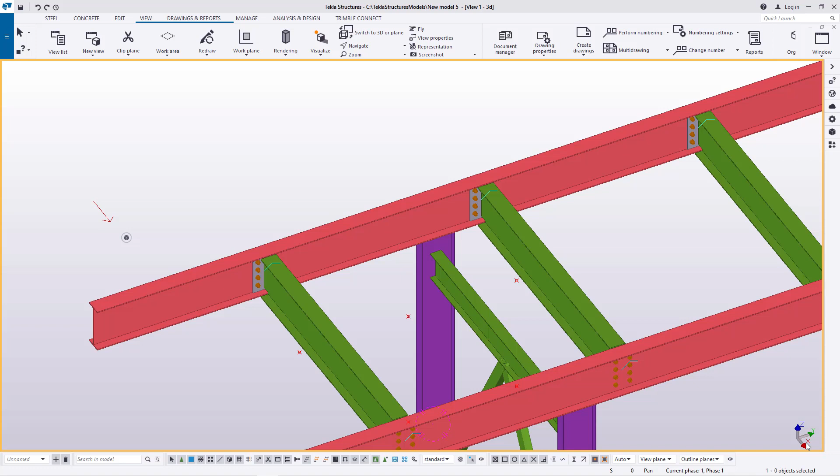Today we are going straight, and we'll be working only on the pedestrians walkway today. Let me just bring it close so that we see actually what we are doing clearly.

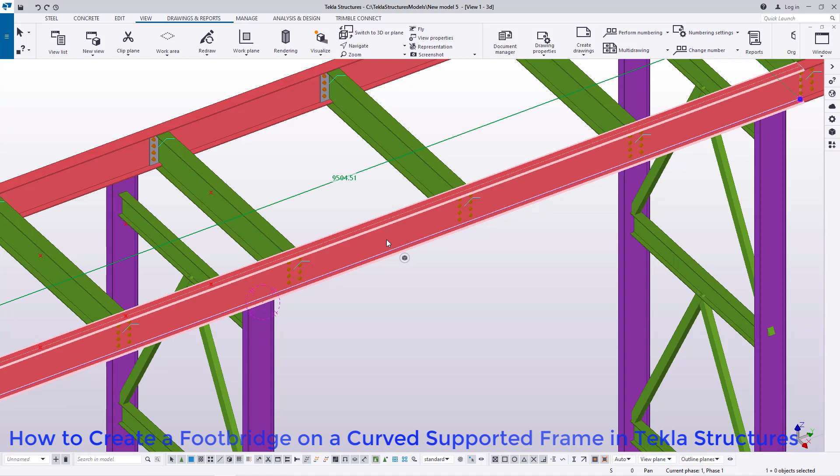Now I'll pick these beams. Let me just arrange myself here and select all those beams. Press Ctrl and select all these. I'll select all these individually because I want to copy them up at a distance of 1.5. Let me just select this.

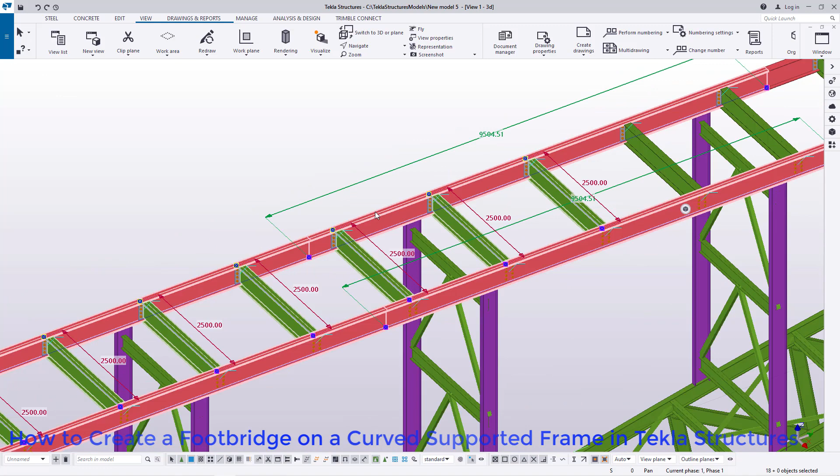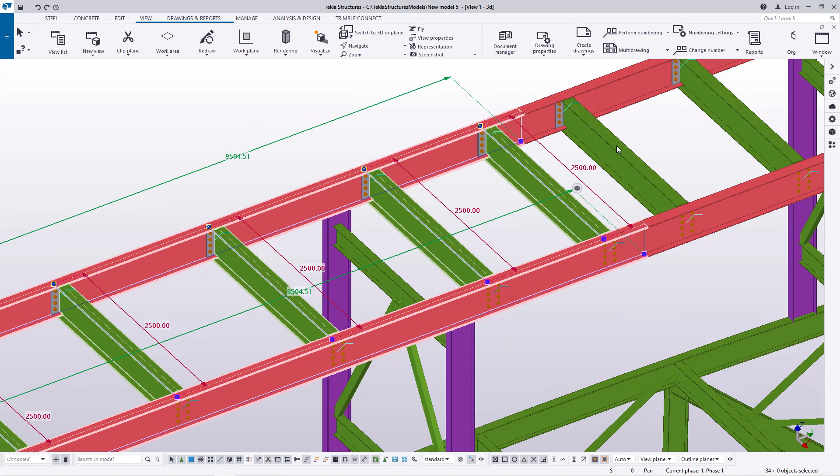Let me select everything here. Select this. You just need to be keen in picking whatever you want to copy to a different location, so that you don't pick any unwanted steel member. Just continue picking these steel members. Select that and select on that and select that.

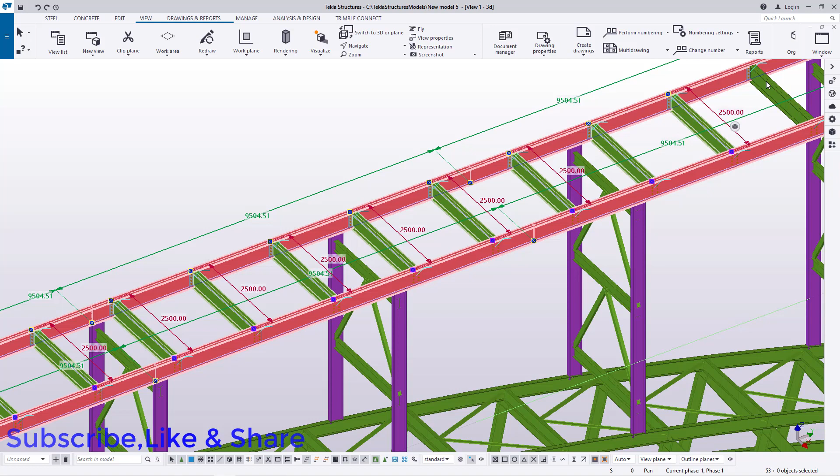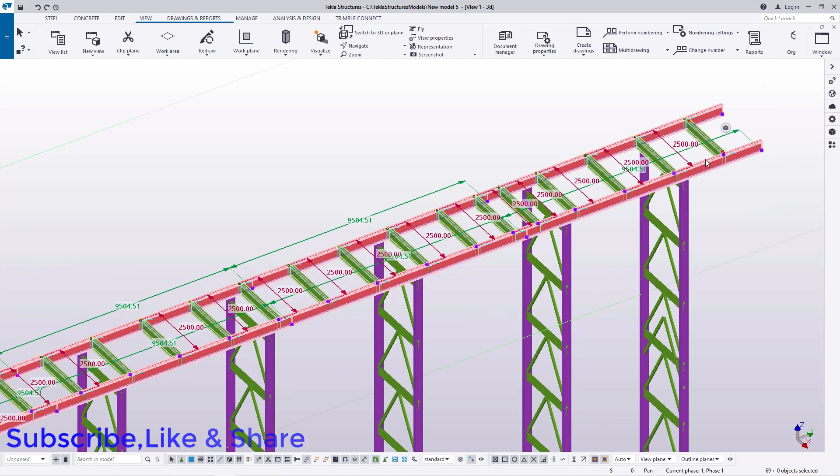I'll select that one. Let me select all these prior to taking them up at a distance of 1.5. Just select all this. It might take a little bit of time, but you'll be happy with what you'll see us doing. Let me just bring it close, press Ctrl, select on that. Now I'll zoom out because I've selected everything.

What I'm going to do now, I want to offset it up, or copy this up by 1.5. I'll right click and come to special copy here and pick linear, and I want to take it up along the Z axis here by 1.5. I'll change this to 0.

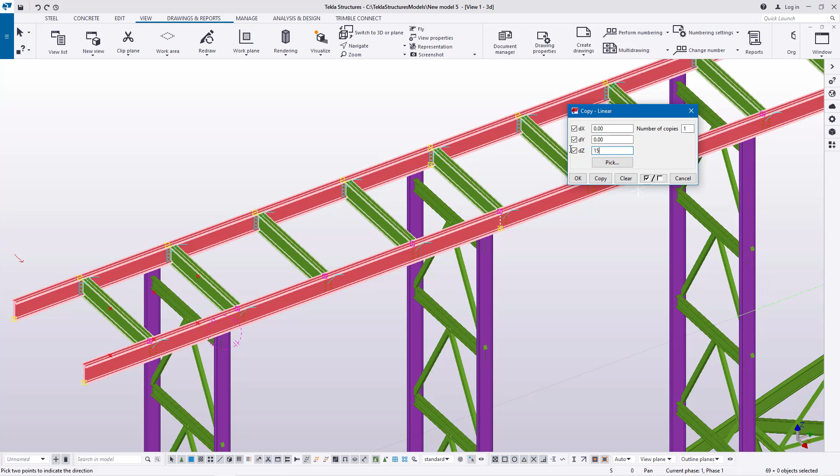I'll change this to 1. I'll change this to 1.5, and I'll click OK. We've copied this up here, and this is how it looks.

You can see that we need a copy or a similar frame on top of this. So what we're going to do, it's simple.

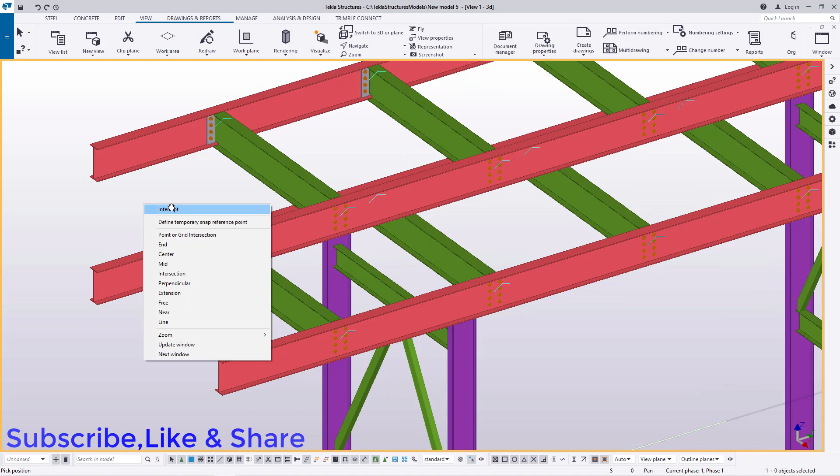I'm going to mark a point along these beams. I'll click any point and pick at any location, and I'll snap right here. I'll snap right there, and snap right here, snap right there. I'll select these points and select that point, right click and come to special copy.

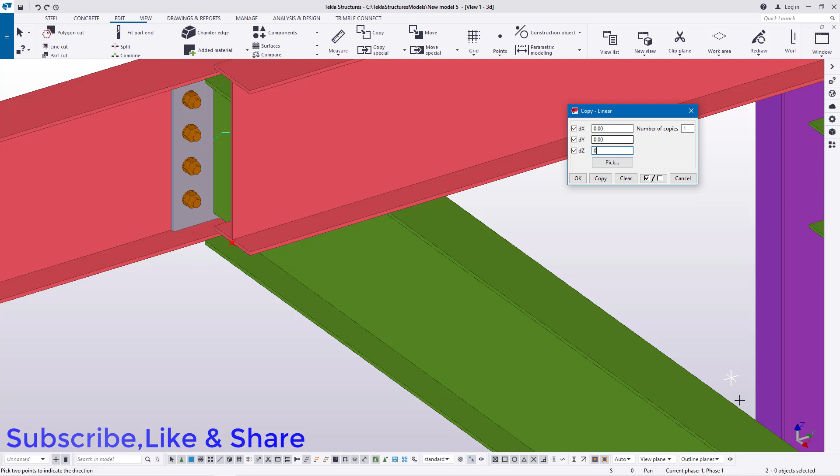I'll copy at a distance of 600 along the y-axis. I'll type 600 and click OK right there.

So I'll select on these points, press Ctrl and select on that point, and I want to copy it from this point away from this point at a distance of 2 meters. I'll right click and come to y-axis here and just feed 2 meters and click OK.

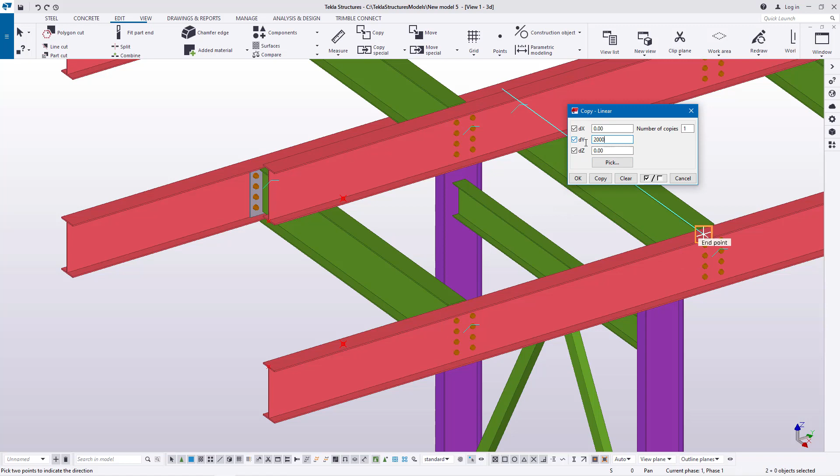That's okay. Now I want to get the midpoint of these 2 points because I want to brace. We are looking for support for this top frame that will be holding a slight thickness of concrete that will be laid on top of this frame.

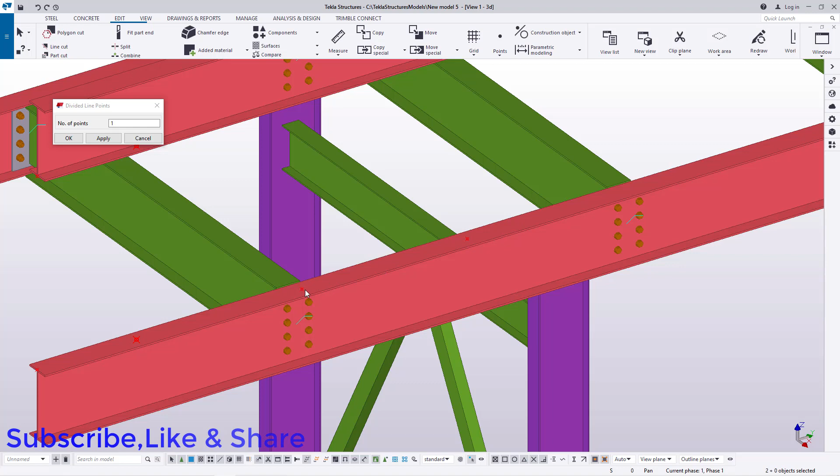Now I'll come to points here, edit and come to points. Then I want to locate a midpoint between these 2 points, and I'll transfer this midpoint upward by selecting on it and copy it right on that spot.

Right click and interrupt and terminate that command. Now I'll come to steel here, right here, and select on that. I'll snap on that spot and snap on that spot, and I want to bring it close so that I see exactly what I'm doing.

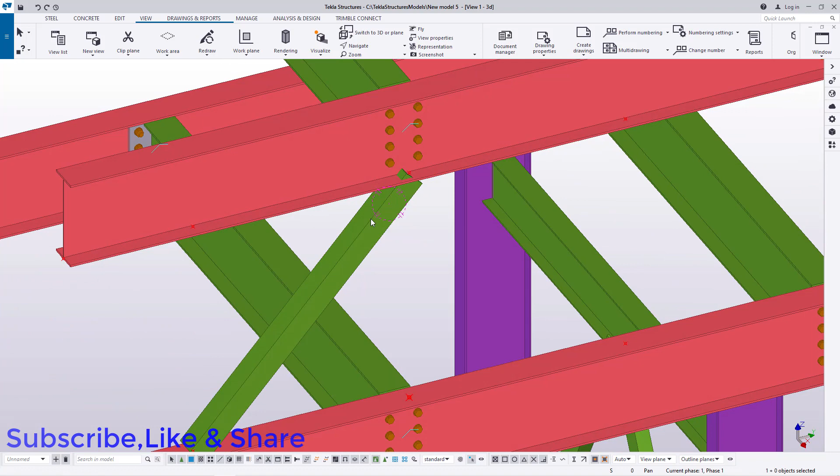Is it correct? This is correct. Let me check this steel member. This steel member is 100 by 100 by 8 millimeter thick. That's okay. And then I'll check the position of this member.

It's positioned in the middle. It's running right at the center of this member. So that's how I want it to be arranged.

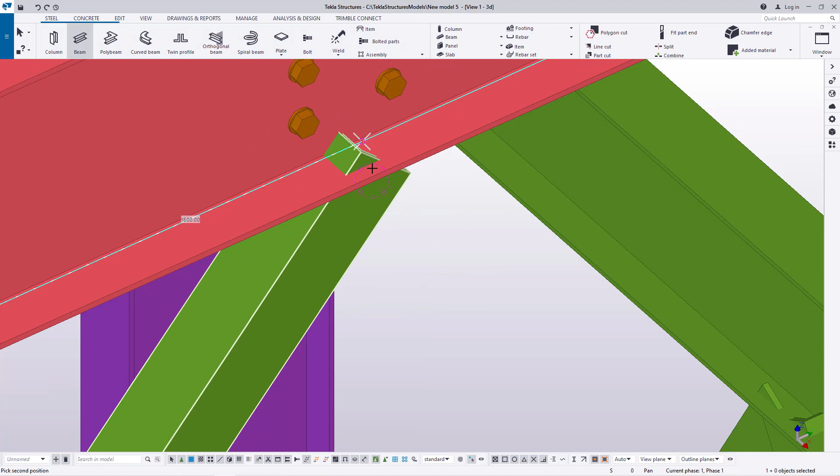I'll come to steel here, pick on the beam and snap on that spot and zoom out and target a point where we located right there at a distance of 2 meters. Now I'll come to new and try to check whether this is correct.

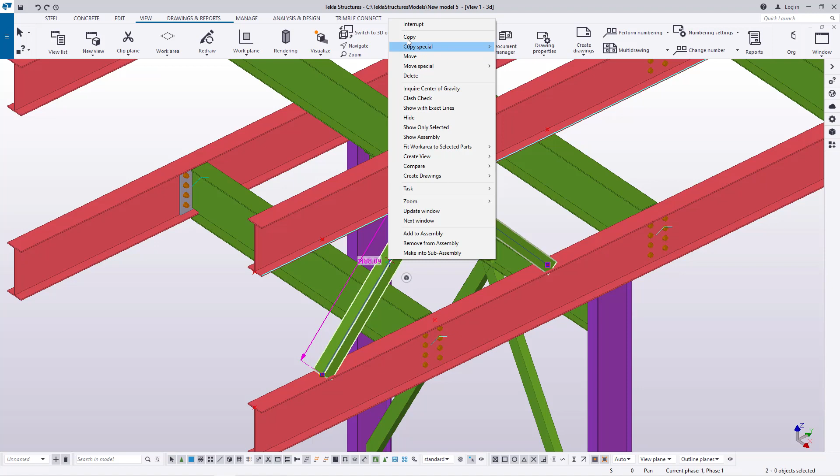This is correct, and what I'm going to do once again, I want to just copy this, select on this and press Control, select on that and come to copy, and I want to copy the same thing at the end prior to invoking a copy command that will populate it along the full length of this bridge.

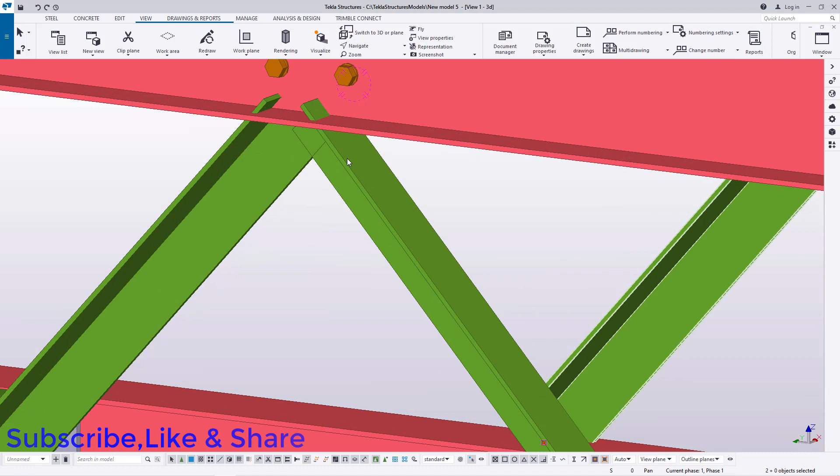So we have another one there, we have another one here. So at this end, what I'm going to do, I want to just turn the back of these members. I'll come to rotation here and I'll pick below. I'll use back and turn that round. I'll pick that also and pick the back end. So that's okay.

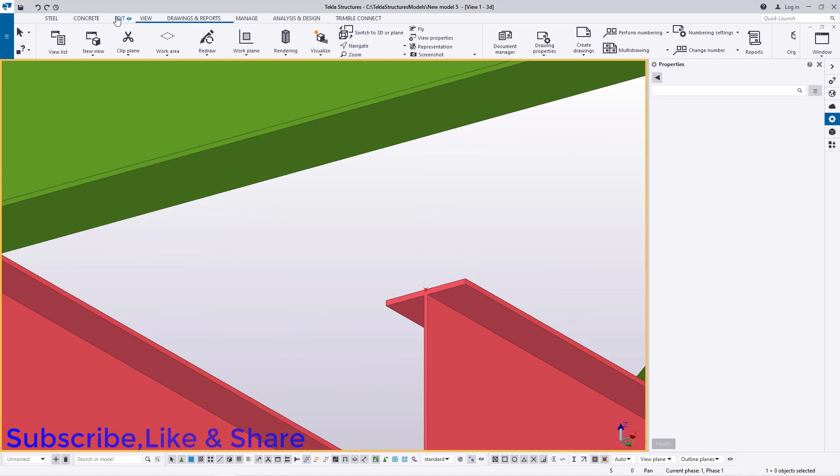Now I'll come to the bottom end of this beam. I want to mark a point because we want to place a brace on the bottom end here. So we must mark the points we intend to start placing our bracings. A point has been placed on top, at the bottom end of that member. Now I want to mark another point here.

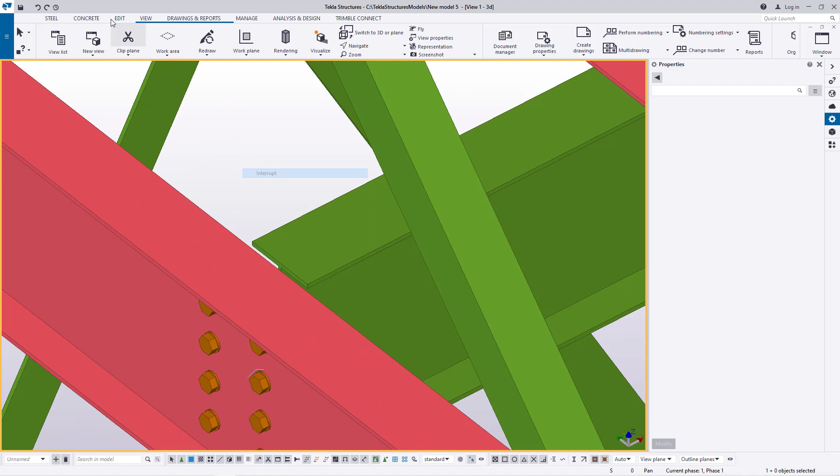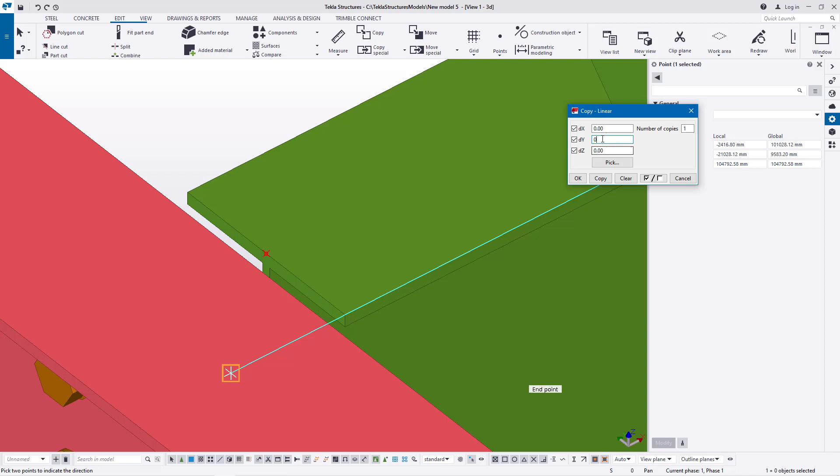Right click and come to point, pick on line points. I'll pick at any point and snap on that spot and select on that point. Right click and come to special copy, pick linear, then check the axis in which I intend to copy this point. I want to give it an offset of 200 along the y-axis, so I'll fit 200 here and click OK.

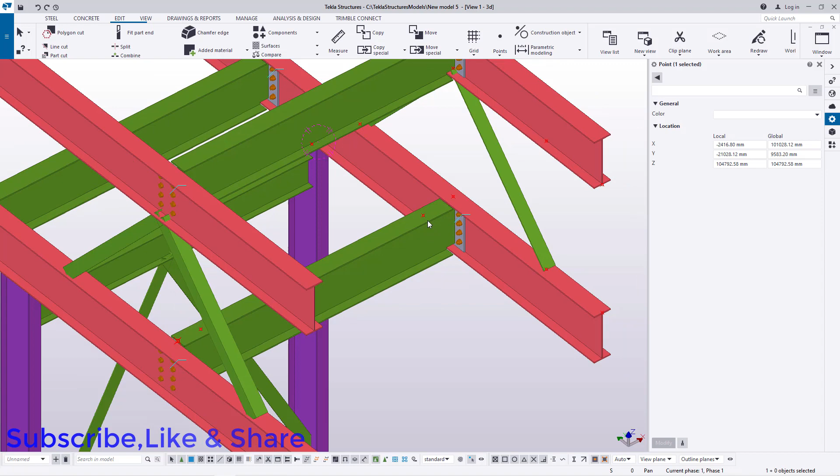I want to copy the same at the end. So I select this point, right click and come to copy, hold it from this spot and copy it at this spot. So we have these points at those locations, this one and this one.

I'll come to steel here and pick a point. I'll pick a point at the bottom end here and place a member right there, and place a member right here. So we've picked a wrong member, we've picked a wrong position.

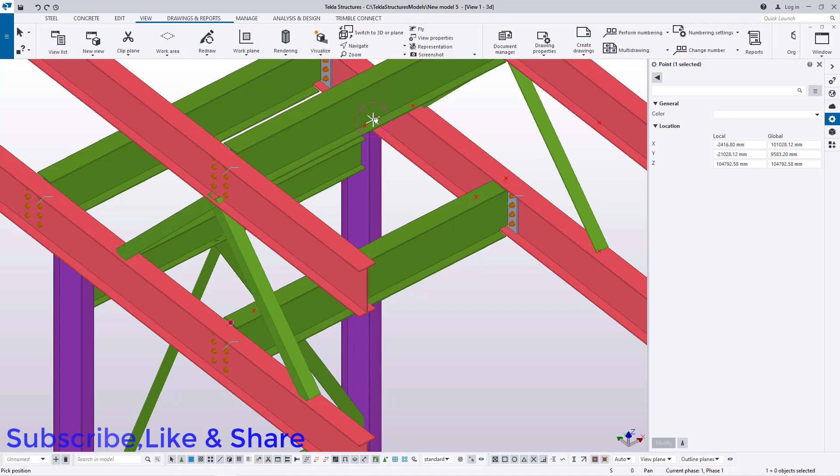So we'll come to navigate. That's why it's key to make sure, prior to placing members, you must be really keen on where to start placement of these steel members.

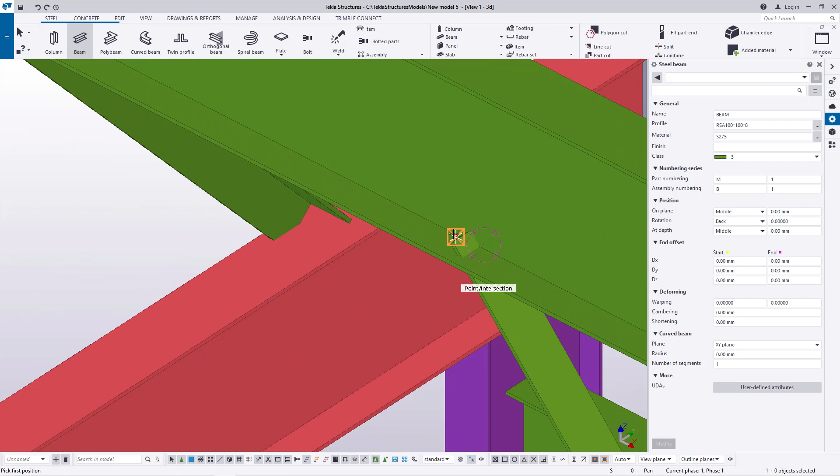I'll come to steel once again, I'll pick beam, snap on that spot and snap right here. And I'll go on that midpoint once again and snap right there. What I'm going to do is rearrange these members to position themselves appropriately.

So what I'm going to do, just double click on this, then pick below and change that so it should be back to back, like you can see.

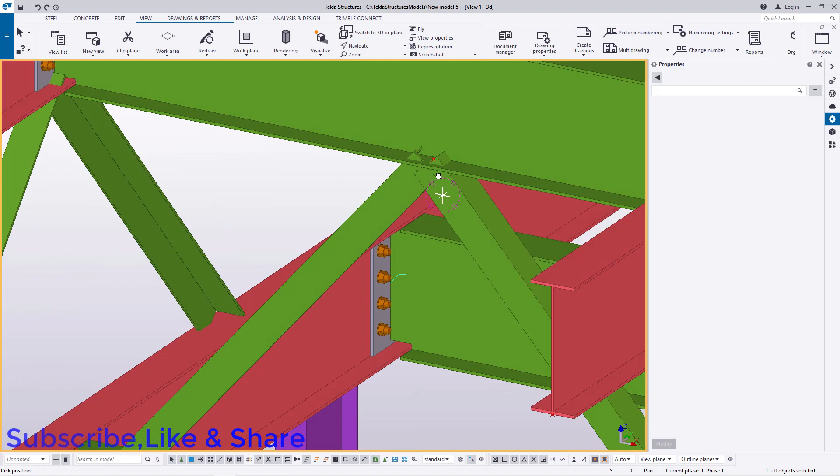So what I'm going to do here, it's simple. I'll select all this, press Control and select on that, right click and come to navigate. I'll turn that round and press Control and select on that. I'll right click and come to special copy here and click copy. So which axis do we intend to populate this along? We'll copy this along the x-axis, along the y-axis here.

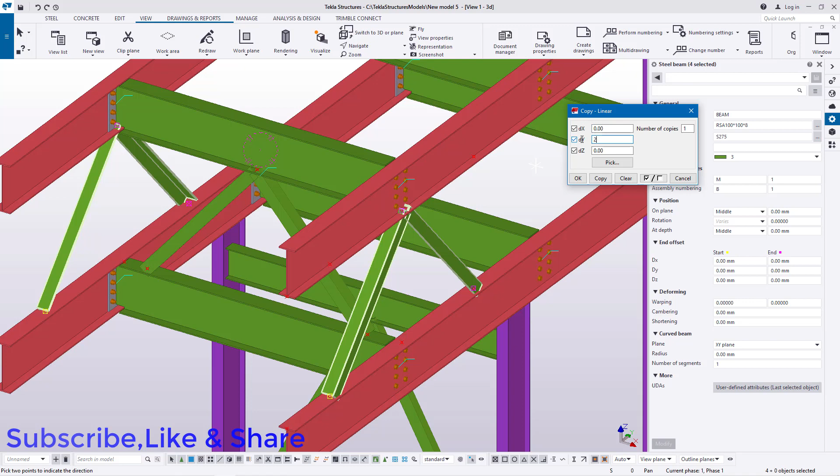This will be copied at a distance of 2 meters, so we need 104 of this. I'll zoom out and invoke the copy command here. We'll go ahead and click copy, and there is a request to expand the view. We'll just ignore that.

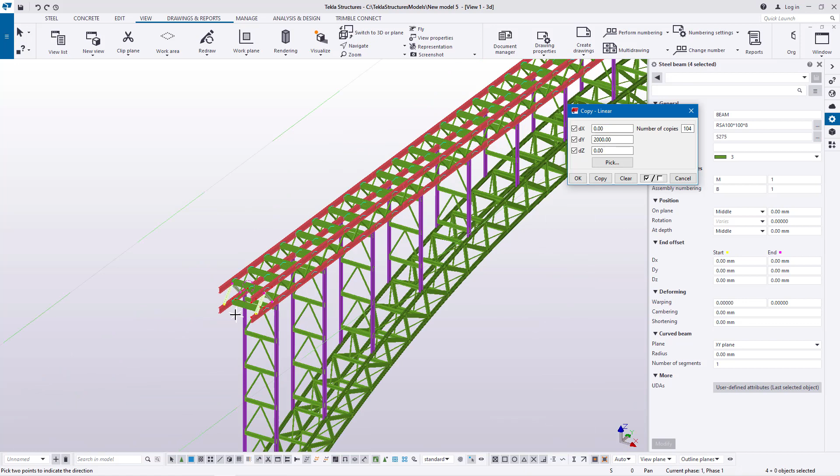It's way out of our reach. So what we are going to do is undo that and change this to 46 and click OK, so exactly it will end right there.

I'll come to that and you can see the braces are exactly in the best position where we intend them to be. Now I'll come to navigate.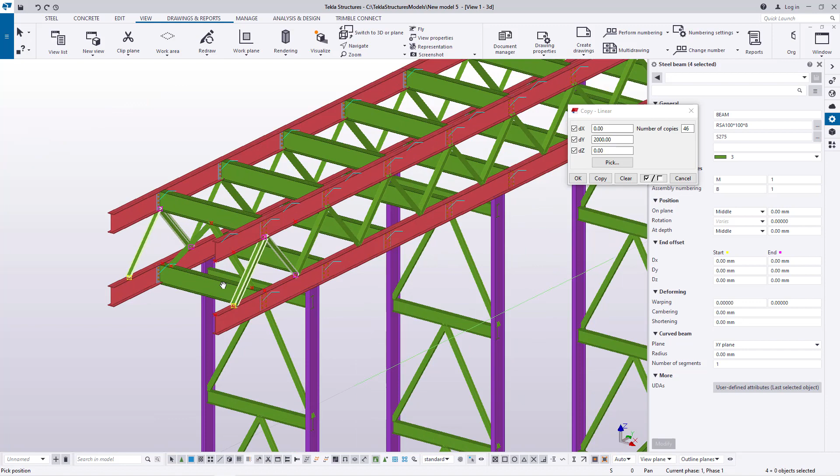I'll come at the bottom end here and I want to copy these members. Don't worry about the connection of these members, that will be done later once we've arranged all the steel in the right positions.

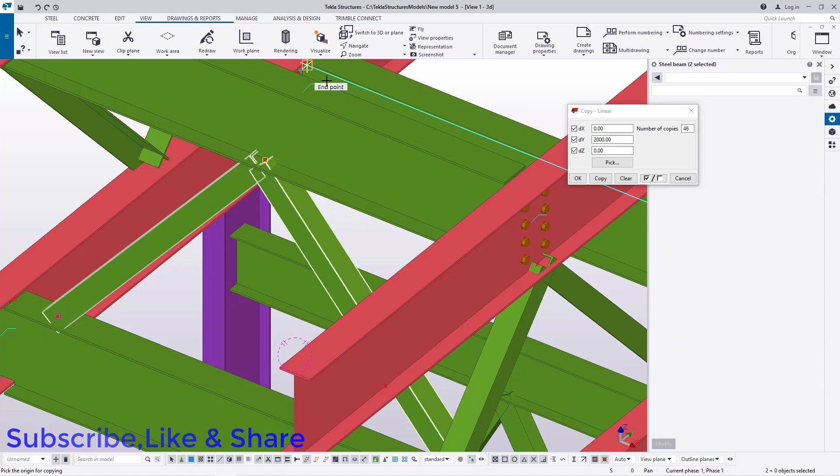Now I'll press Control and select the other member, right click and come to copy. I want to copy this member from this position right here and go all the way and place another one right here. I'll snap right there, we have another one in place, and come and place another one right here and populate this.

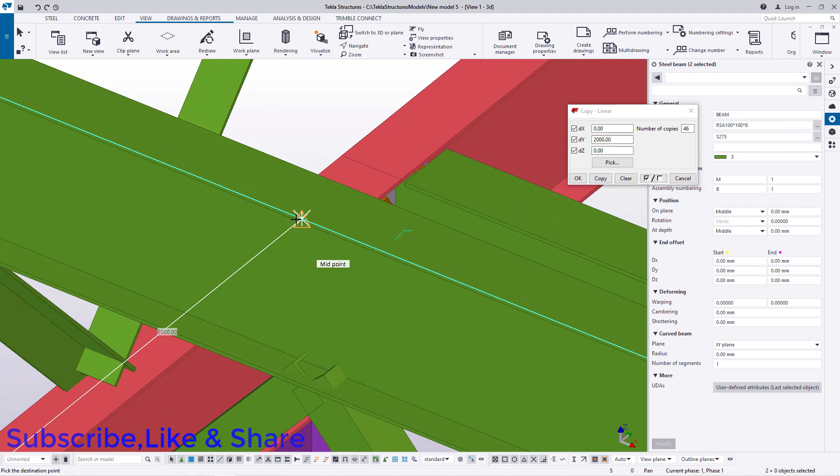A reason why I'm doing it manually is because some distances are not equal, so it's not good to use a uniform distribution, since the center to center distances on other beams are not the same. So I prefer doing it manually so that we do it accurately.

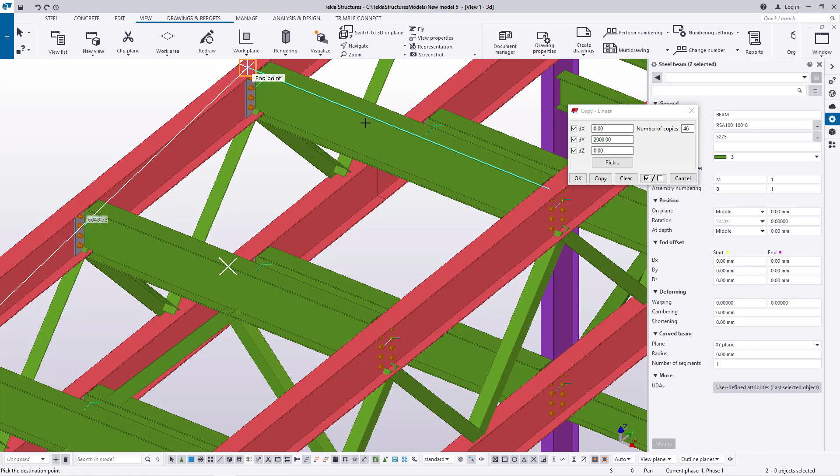Now I'll go to that member and place another one there. I'll go to this member and place another one right there. I'll come here also and place another one. No matter how long it takes, what matters is how accurate you were when doing this.

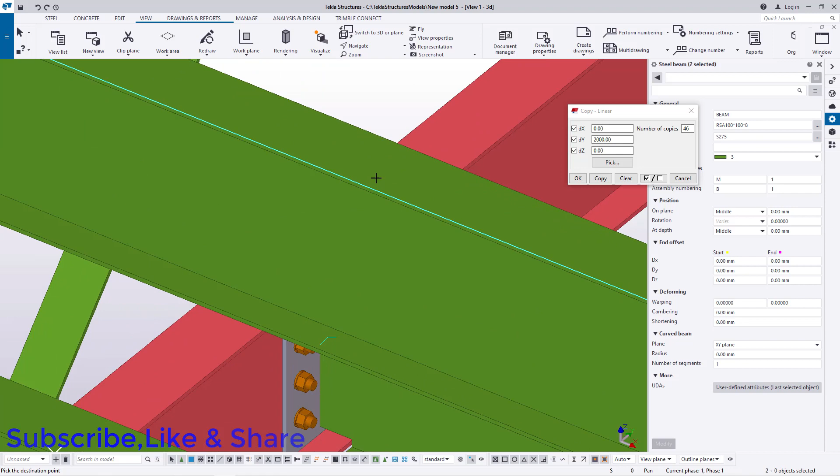Because when it comes to generating the drawings, it's always a waste of time going back to the model to modify it the moment you find your drawing is not coming out correctly. So when you come to model, it's a total wastage of time. You should mark the one right here, another one right here, another one right here. Perfect, and we are closer.

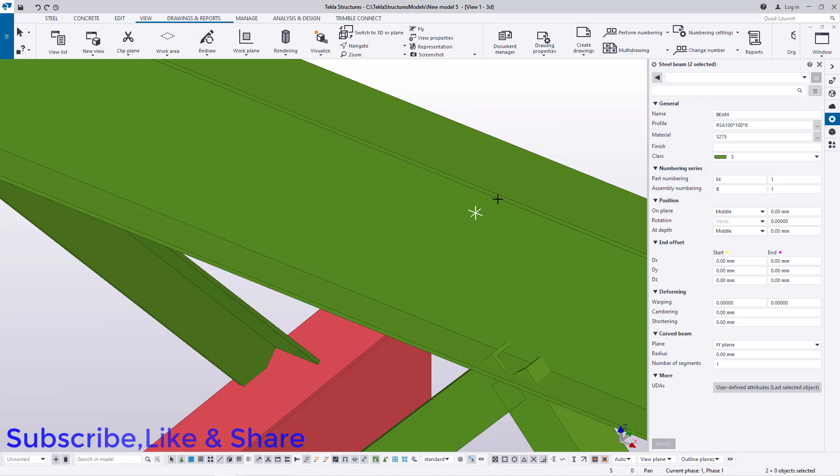We are closer to the end, and here we are at the end of this. I'll close this and come to navigate, and if I rotate this, you can see our braces are perfectly arranged to the best positions so far.

I'll right click and interrupt to terminate that command. I'll come to navigate and rotate this, and you can see how our braces have been arranged.

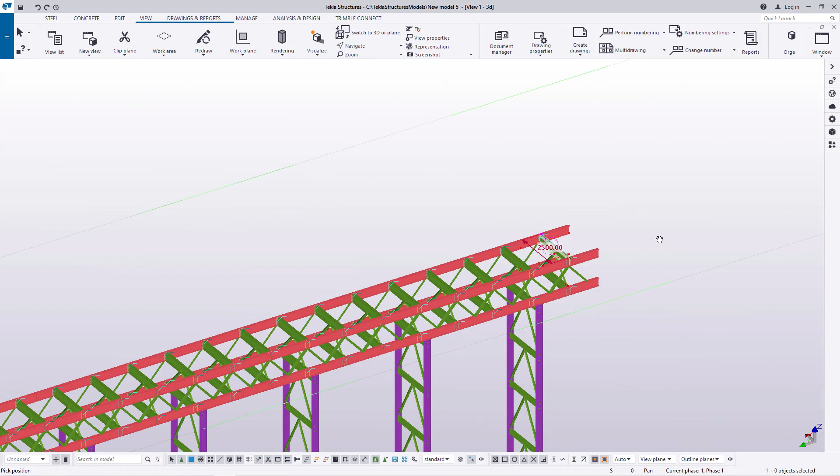So I'll come this end, I'll come to this far end, and what I'm going to do is to place a sheet on top of this. I'll come to panel here. I'll just type panel.

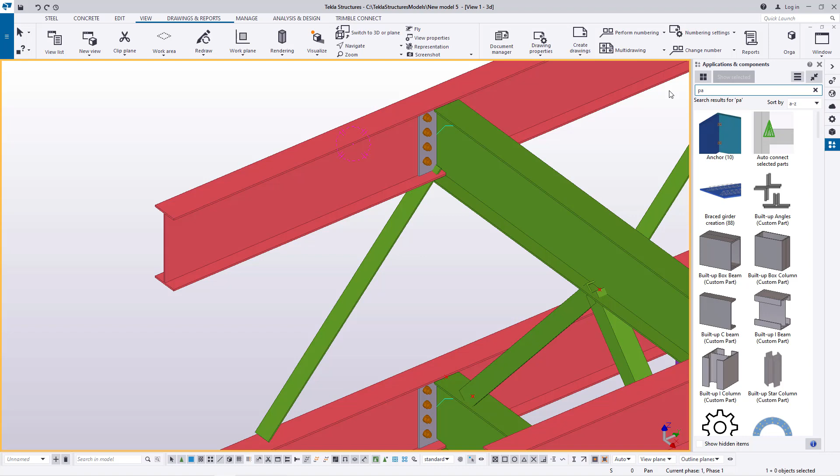Just type panel. Scroll down, and we need a panel here that will be holding our shear studs. Just type, we have it here, panel in database.

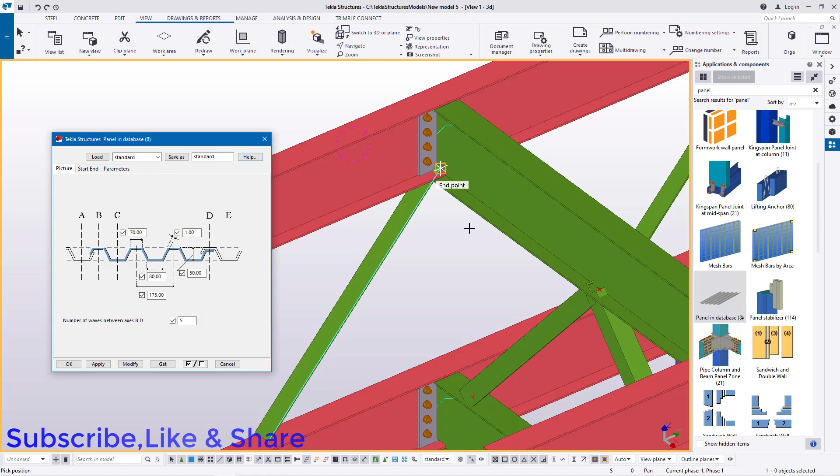Just double click on it, and what we are going to do is just pick the first position right there, and this will be our next position, and our next position will be here. Just give it some time to process that information, and here we are.

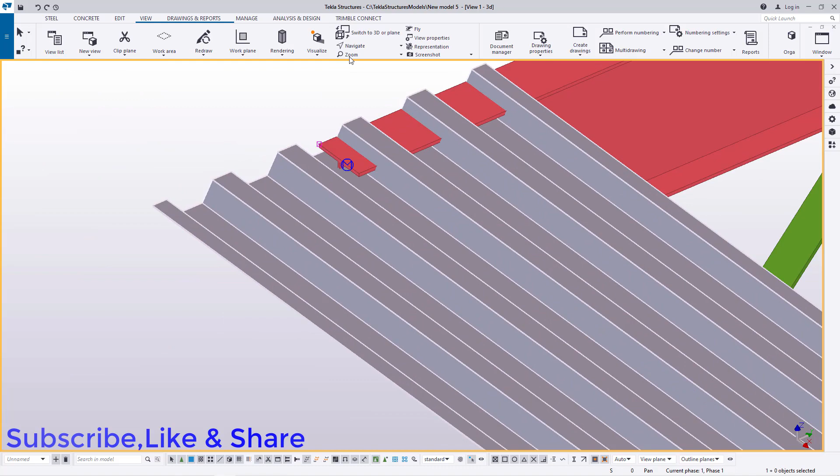I'll close this. Now I'll come to navigate, rotate this, select on it, right click and come to move.

I'll zoom closer and pick it at the bottom end here and bring it somewhere there. Select on it once again, and I'll pick at the bottom end and place it right there.

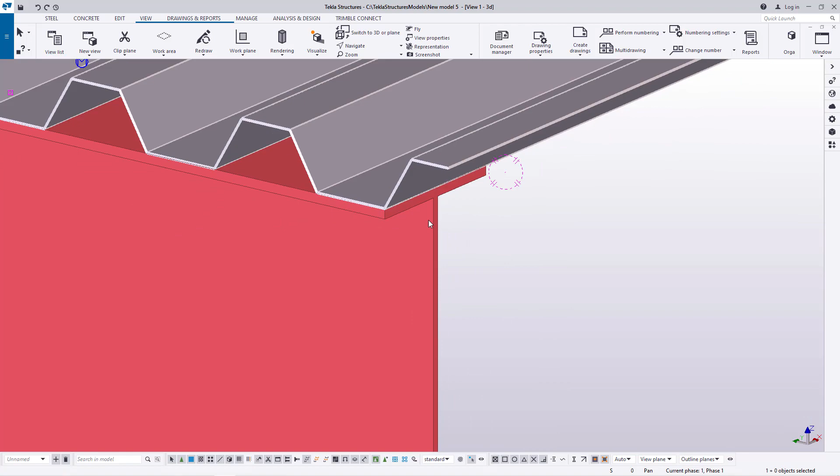So I'll come to navigate once again and turn that round, and what I'm going to do is to lay the studs, place the studs on this sheet.

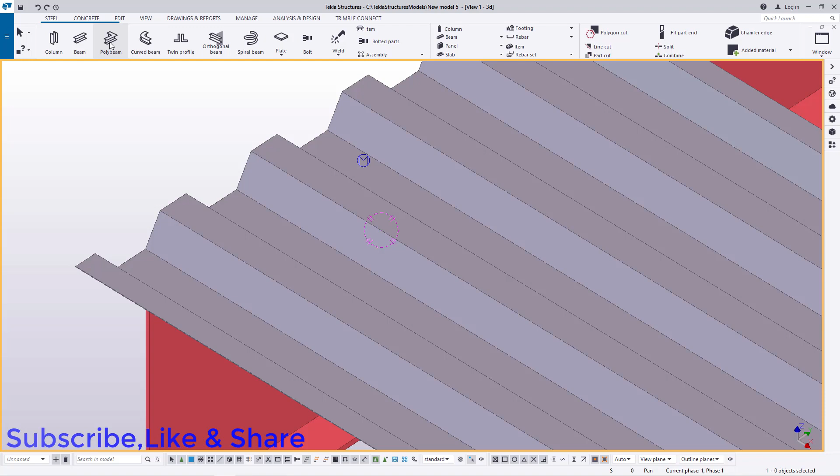Now I'll come to interrupt, I'll come to bolts here, I'll come to steel here, I'll come to bolts. Where are the bolts? I'll pick on the bolt and select this member, select on it once again, then press my mid button on the mouse, and I'll select on this, at the center of that.

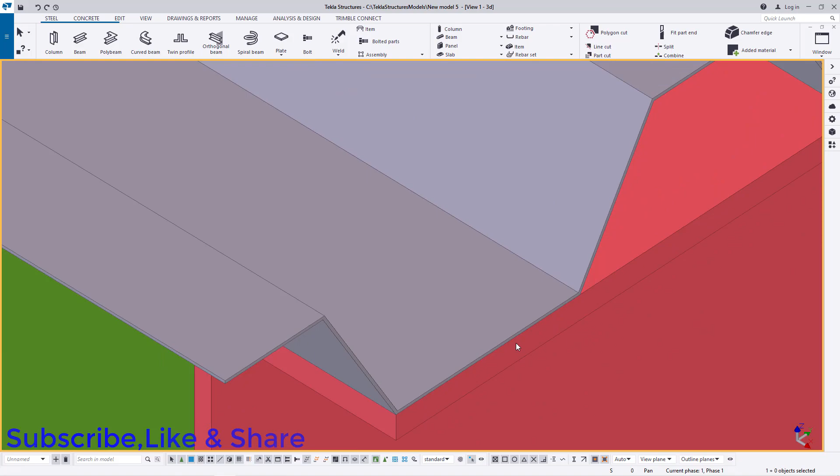And move all the way to the center of this, and I'll snap right here. Right click and interrupt to terminate that command. So we have these studs arranged.

So once again, what I'm going to do is very simple. I'll come here and double click, or if you don't double click, just come and rotate this, pick a rotation point, and we want to position this to

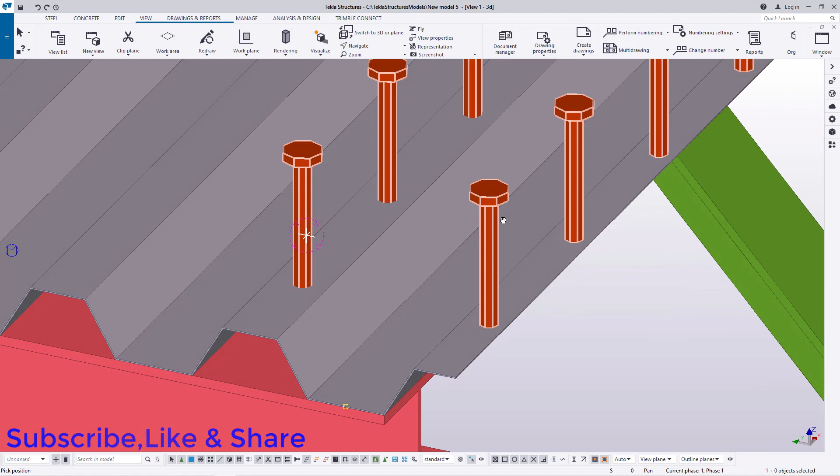the bottom end here. Let me just select on this and do that. Select on this, press Control, then I'll snap at the bottom end there, and I want to place them right there. I'll get rid of this.

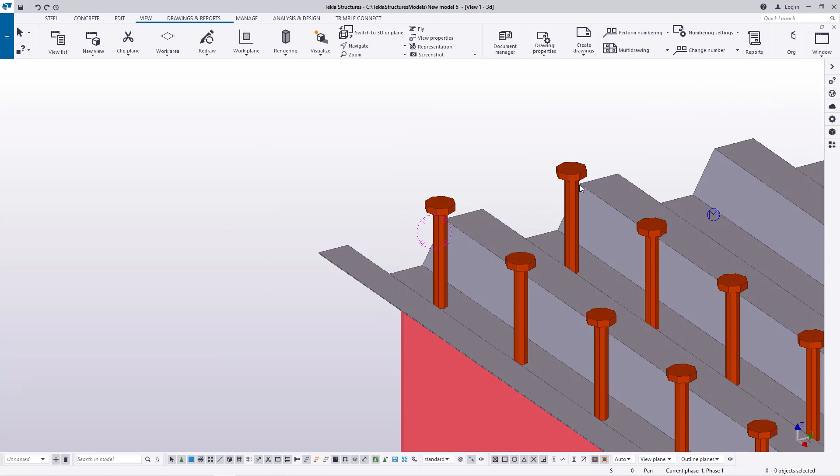Come to Navigate and rotate this. We can change the size of these studs by double clicking on it, and you can either use Nelson or the common one, and we can just retain it, and maybe reduce the size to 12.7. Then undo that.

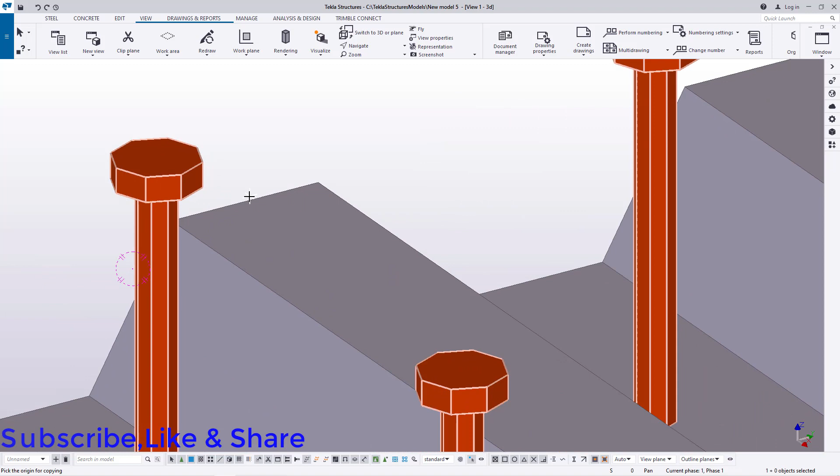Select on this and pick copy. So I'll pick it from that center and move it all the way to this center here, place another one there, and what I'm going to do, I need another one on this groove.

So what I'm going to do, just select on copy. Copied everything here, just select this member and select all these studs. Then right click and come to copy special here and click linear.

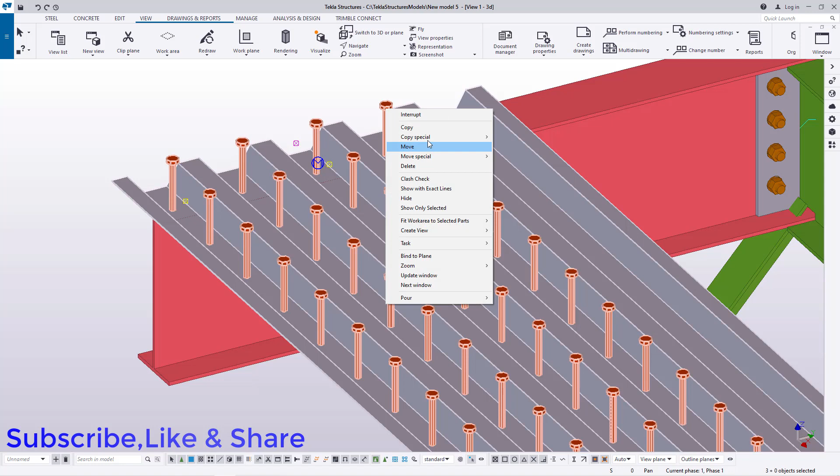Then I want to populate this along the full length of the bridge, taking into account the length of these, the width of this corrugated sheet. Then just get the width here, which should be 900.

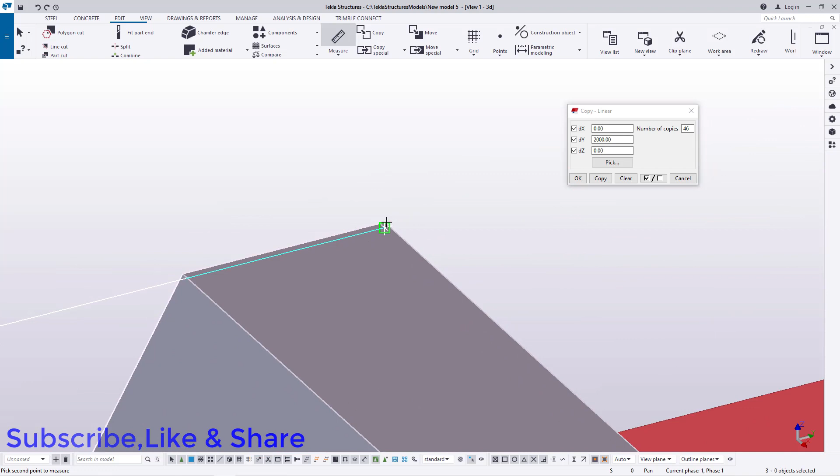So what I'm going to do, once I've selected everything, I'll feed 900 right here, 900 right here, and I'll go ahead and just feed here 104, and I'll click OK. I'll click OK and zoom out and check whether what I've done is correct, and absolutely it's correct.

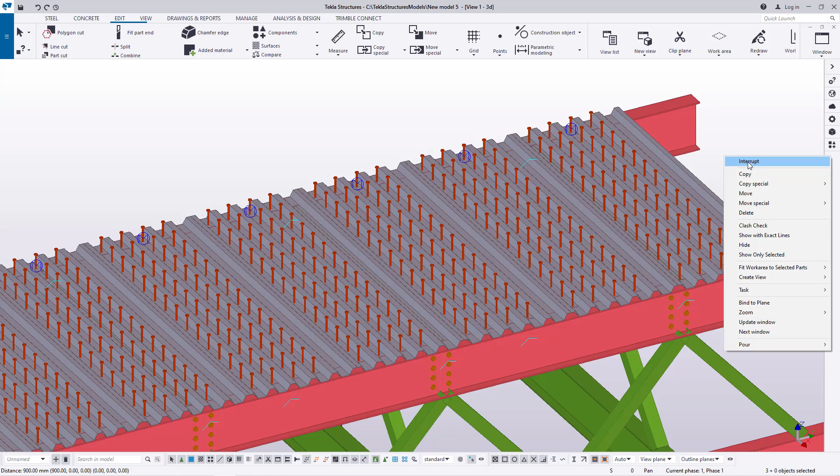And I'll click on empty screen, and if I come to view here, I'll come to navigate, and if I rotate this, I'll be able to have my studs already on top

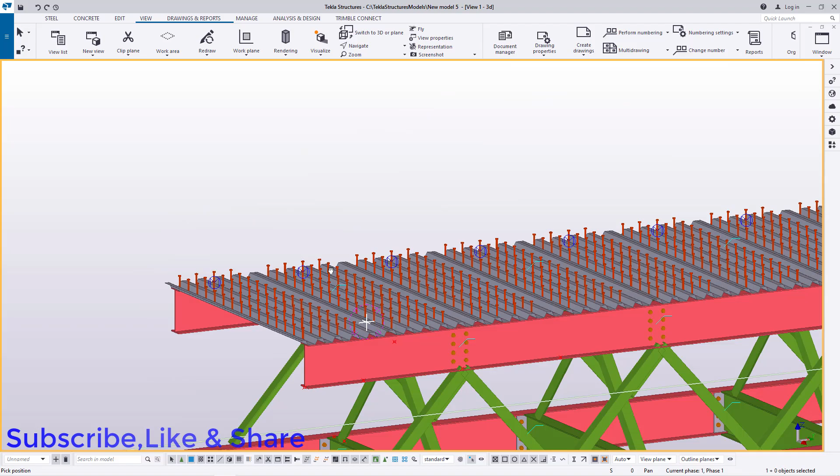of this sheet. Now our concrete will be laid on top of these studs, so that we provide a walkway for pedestrians. So you can take a look at that, you can see that in place, and this is how it looks. This is how it looks.